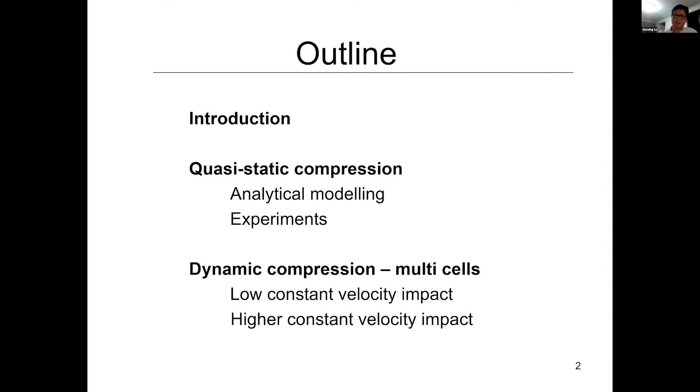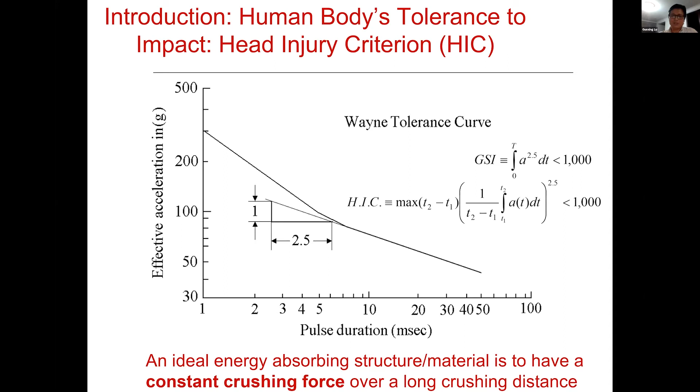This indicates that when we design an energy absorbing structure or material, we want to make sure that the force is a constant force over a long distance or long stroke. The reason being that if the force is too excessive, from Newton's second law, the acceleration, which is equal to force divided by mass, will be excessive. So ideally, when we design a structure or materials, we should have a constant force over a long stroke.

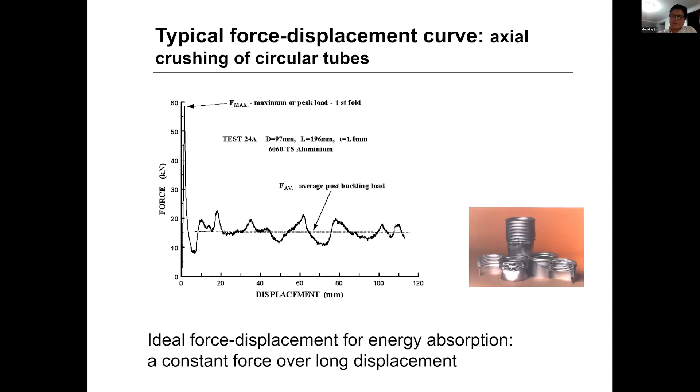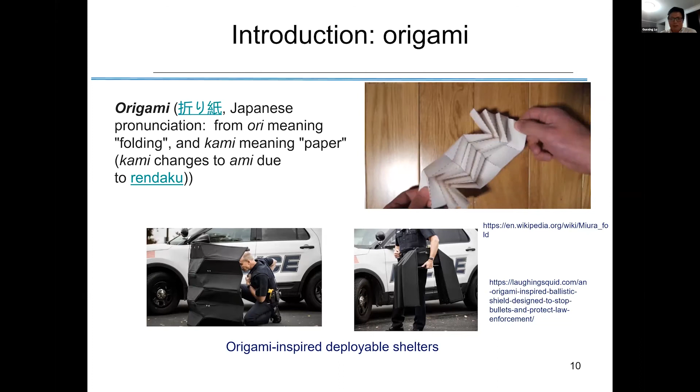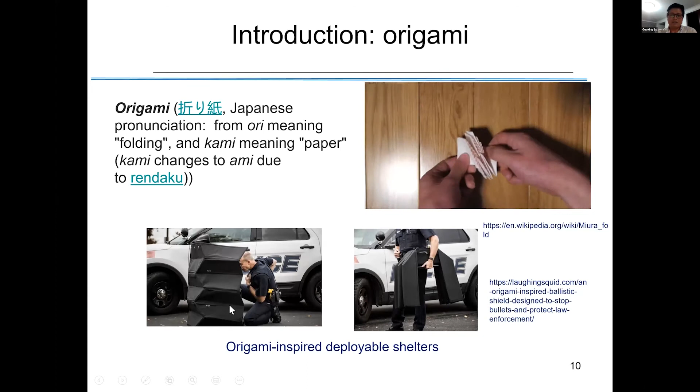One example is shown below by Professor Larry Howell from Brigham Young University in the States, whom I met a few times. Larry actually designed a foldable shield made of Kevlar. This is portable, and we can transport it to different places.

And that acts as a shelter for policemen, for example. And once it's done, then we can fold it and pack it in the car and drive away. So this is one application of origami structures as a deployable structure.

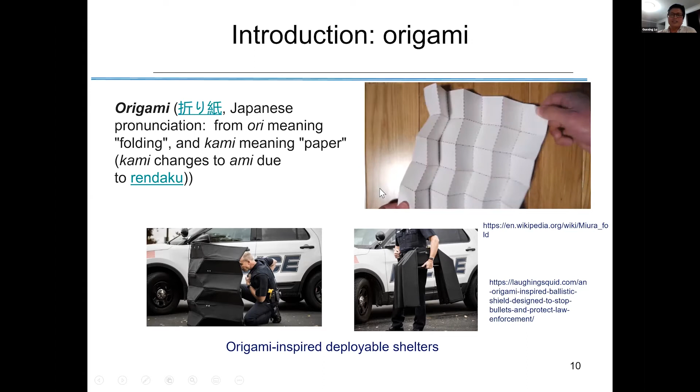Our interest is slightly different. We try to apply the concept to design so-called metamaterials. A metamaterial is an artificial material from which we design the microstructure and put them together. Then overall, globally, we can obtain or achieve certain properties which are otherwise impossible to achieve. So for us, we are interested in the energy absorption of these materials.

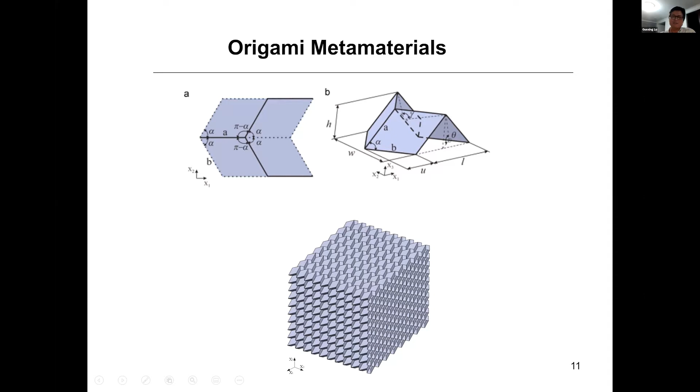So from geometry, this unit cell has got a few parameters: the side length A and the side length B, and the angle alpha. This alpha is within the plane first. So these are the three variables to start with.

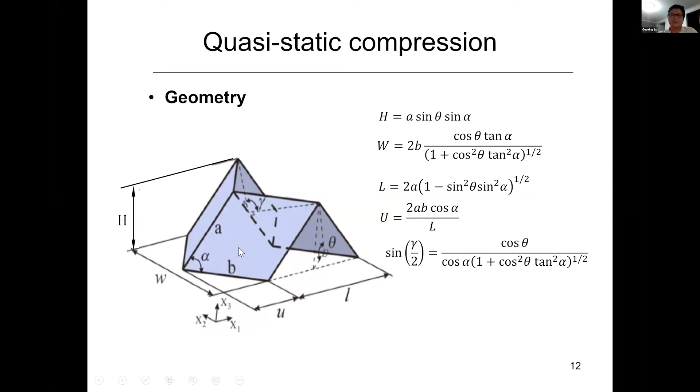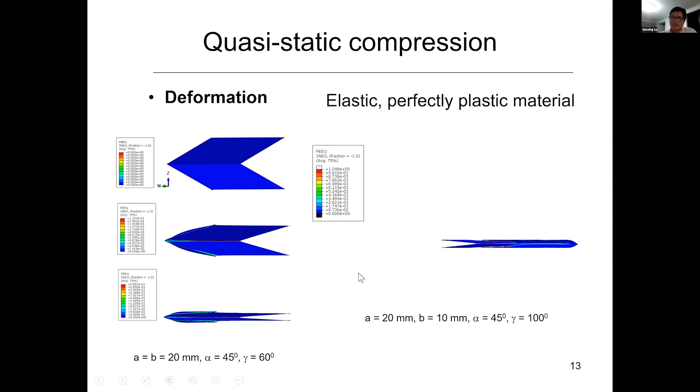So that encourages us to make use of plastic analysis for this unit. Because it's a large deformation, the elastic deformation is small, and we usually ignore the elastic deformation. Also for simplicity, we assume the material behaves like a perfectly plastic material, which means that the yield strength does not change with the strain.

So we can write down the work balance equation for that unit. On the left-hand side, it's the force times the increment of the displacement in that direction, so that's the work done by the external force during an increment of displacement. On the right-hand side, we assume that the work done externally is dissipated by the plastic bending along the hinge lines, along all the creases.

And these are represented by two terms on the right-hand side. The full plastic bending moment, as we all know, is simply equal to the yield stress of the material times the thickness of the sheet squared, divided by 4. That's the bending moment per unit length.

So we can do a bit of mathematical manipulation, and we realize that the angle theta, which defines how much we have folded, actually corresponds to the displacement globally as well. So therefore, we can get a force as a function of theta, which is also a function of displacement.

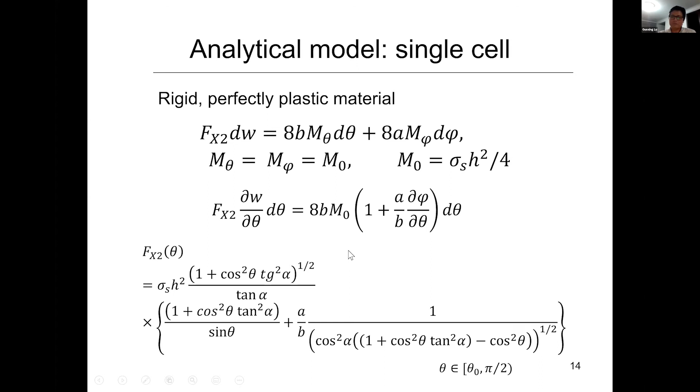The other important parameter is what's the maximum displacement that we can crush, so that is WF. Again, it's purely geometrical, so from geometry we can work out this expression. And in terms of strain, the densification strain will be equal to the maximum displacement over the initial length, W0. Okay, so that gives us the densification strain.

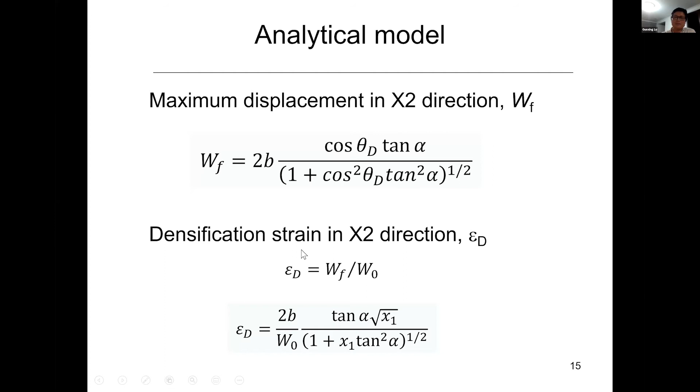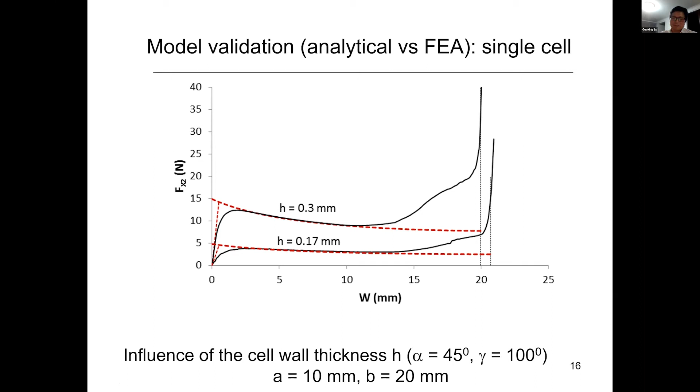So if we plot the force against the displacement, the dotted line is the analytical result for that unit, and the solid line corresponds to the results from the finite element analysis. We can see that the agreement is fairly good for most of the force-displacement curve, except towards the end, the actual deformation is slightly different from what we have assumed using the plastic analysis. There is some contact between the faces on the sheets, and therefore from the finite element analysis, the force is larger. But overall, in terms of the force displacement, the agreement between the analytical results is pretty good with the finite element results.

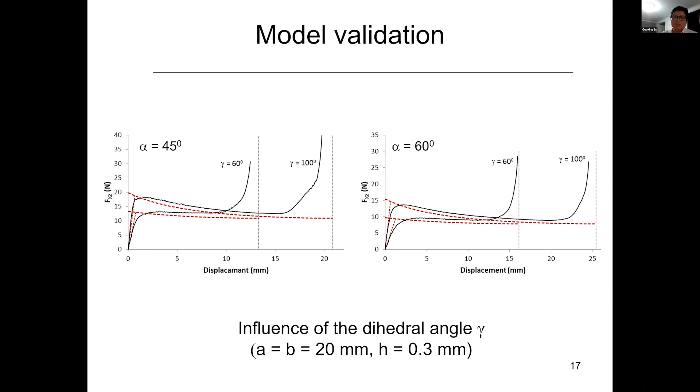We can also look at different values of parameters and see the results. Overall, they are pretty good. Then we try to apply this method to the whole block of material. That's a relatively easy task, because we just need to count the number of cells and count the number of hinge lines.

Then we can figure out the plastic bending energy for this piece of material. On the right-hand side, we made this piece of material with 4 layers of origami sheets glued together. It's made of aluminum, and we do a quasi-static compression test. On the left-hand side, we have a force displacement curve. The solid line in blue is the test results, and the solid line in black is the analytical result.

Again, our very simple analytical result agrees fairly well with the test result, even though we have made the assumption of a rigid, perfectly plastic model.

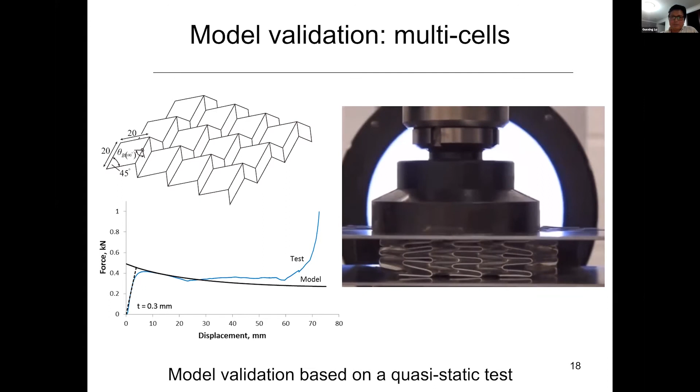Now, we are all very familiar with cellular materials such as honeycombs, foams, and so on. So naturally, when we define the mechanical properties of such materials, we quite often make use of something called relative density. We were very interested in calculating the relative density for this origami metamaterial.

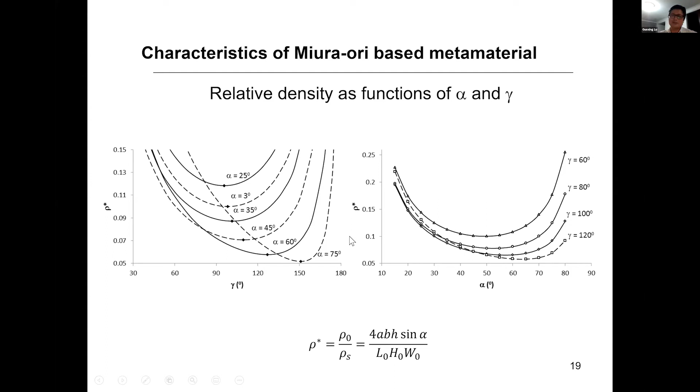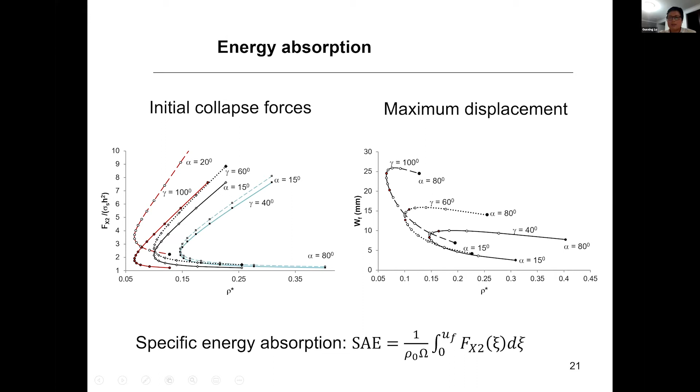Then what we did was look at the specific energy absorption, which is energy absorbed per unit mass. We can integrate the force over displacement to get the energy and then divide by the mass, which is the density times the volume. So we can work out this quantity.

Our interest was how this material compares with, for example, honeycomb. We look at the expressions for a usual honeycomb under in-plane compression, and the specific energy for the honeycomb. We also define something called the efficiency factor, which is the specific energy times the density of the solid material over the yield strength of the material. That's really to eliminate variation caused by the parent material property.

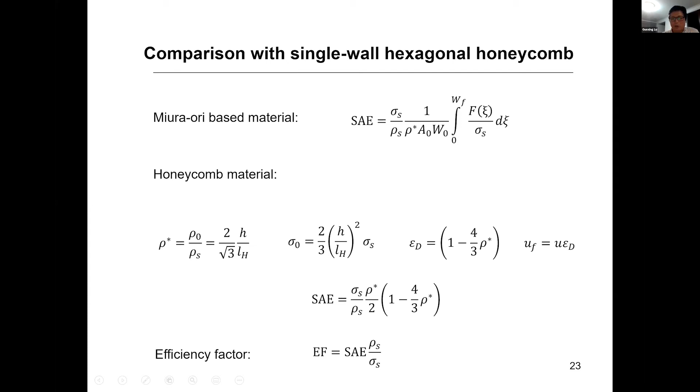When we plotted this efficiency factor as a function of relative density, the red line is for honeycomb, and the points and solid lines are for the origami metamaterials. Once we did this first plot, I was quite disappointed, because almost all our points for the origami metamaterial are below the honeycomb, indicating that this material is not as good as honeycomb.

So we tried again with other values for the geometries, and interestingly, we found that under certain geometries, shown on the graph on the right-hand side, the behavior of this material could be better than honeycomb.

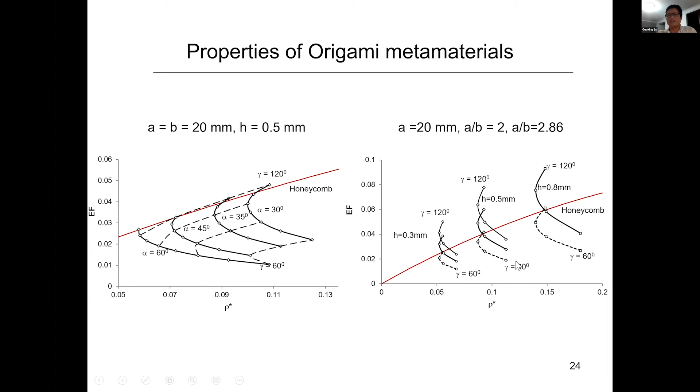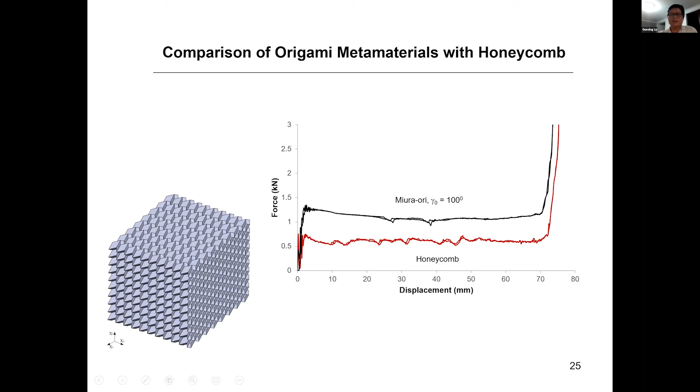Just to show this concept, we did finite element analysis for this piece of metamaterial, and we get this black solid line on top. For the honeycomb, we get this red line. That demonstrates that sometimes we could get slightly better performance.

So that was for compression in one direction. Naturally, we were thinking, how about compression in the other direction? So we took nominally the same piece of material and crushed it in the other direction. This is what happens.

On the right-hand side, we plot the force as a function of displacement. You can see experimentally, the red line is shown here, and the blue line is from the finite element analysis.

And from the simple geometry, we realize we can work out the analytical solution quite easily as well. The analytical solution is this dark square line here. Interestingly enough, the analytical results show very good agreement with both the test and the finite element results.

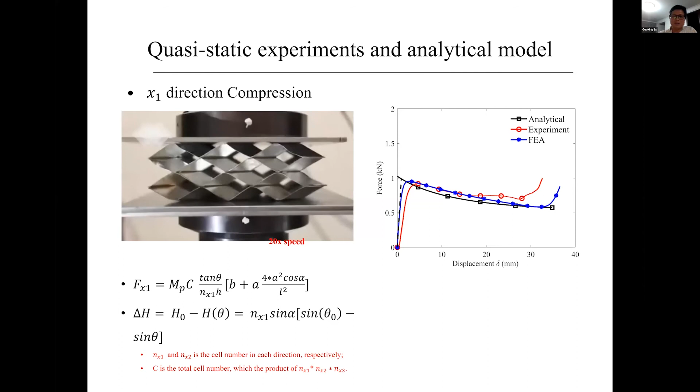We also look at the crushing in the other direction, the third direction. This is what happens. We plot the force as a function of displacement, and again we get experimental and finite element results.

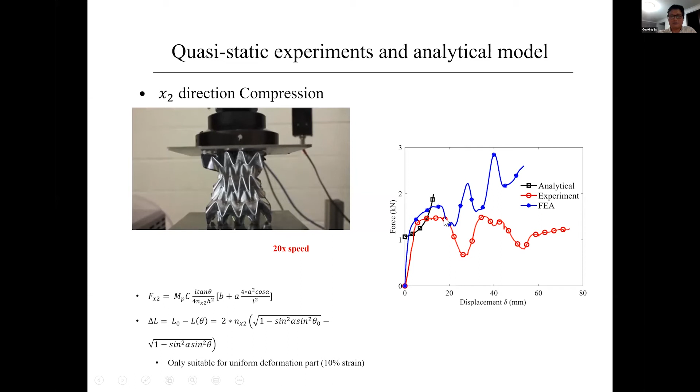Initially, this material behaves like a piece of bulk material until, towards a later stage, you can see localization and also buckling and so on. At least for the initial part, our analytical solution for this direction seems to be okay, even though it's not as great as for the other two directions.

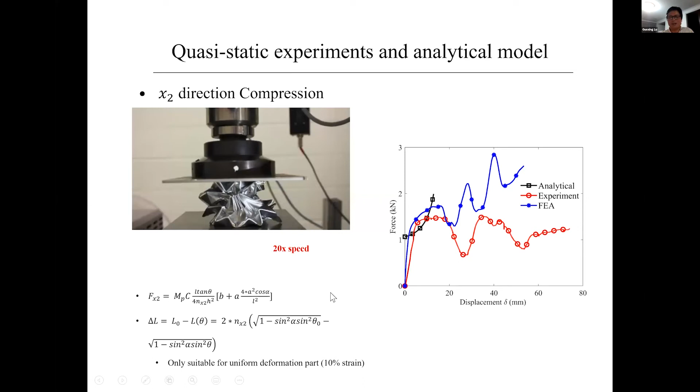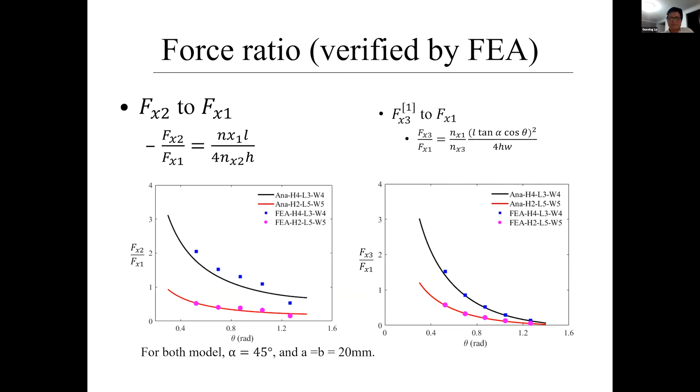So again, we can look at this approach for different values of folding angle and so on. From finite element analysis, and also our analytical results, we seem to have a very good agreement for the forces in the other two directions. So that was for the quasi-static case.

Now the question is, what happens if we crush this block of material under impact loading? So we started with a unit cell. You can see the animation from the finite element analysis. When we look at this one, we can see that the force required externally to deform this unit cell is composed of two parts. One is required to overcome the quasi-static strength, which is FQS. The other part is really to enhance the velocity of this piece of mass from initially 0 to a constant velocity later on.

So then we apply the conservation of momentum. On the left-hand side, it's the impulse actually. It's the dynamic force Fd minus the quasi-static force Fqs, and the difference, if we integrate over a time interval, is the impulse. This impulse is used to increase the momentum of this cell, which is the mass times the velocity. The initial velocity for this cell was 0. And of course, the time interval is T1 minus T0, which is given as the cell size divided by the velocity. So we can do a bit of manipulation.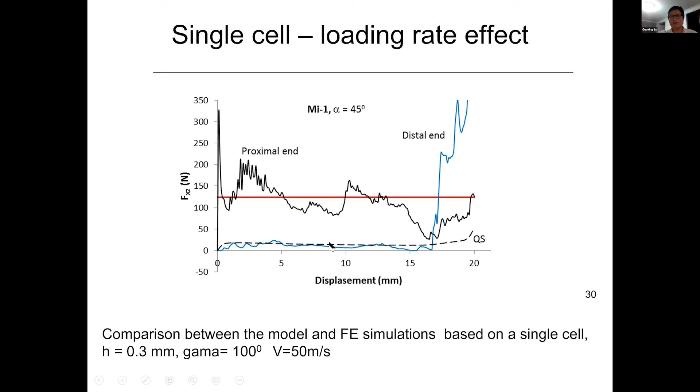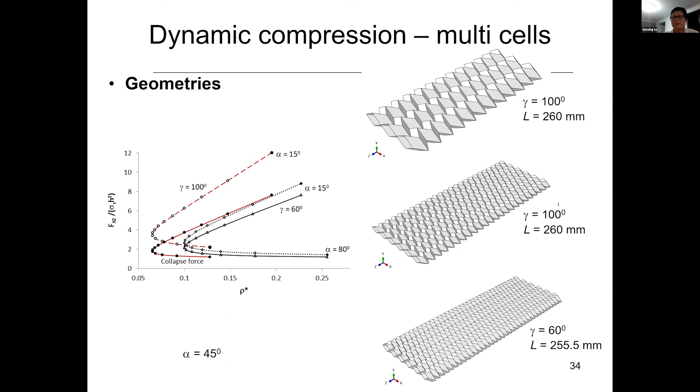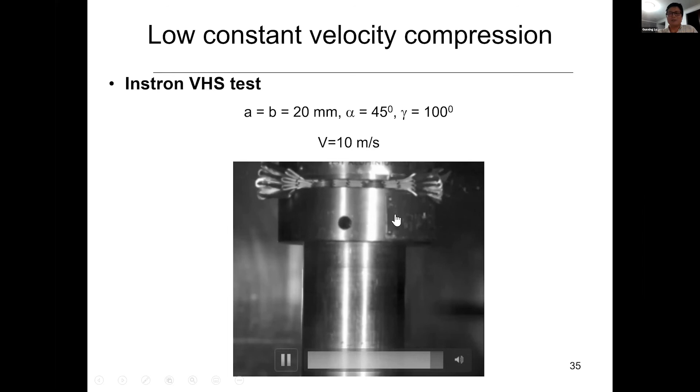So that was for the unit cell. Then we wondered what happened if we have a block of a so-called metamaterial made of this sort of unit cells. So if I do an impact test, now this is a compression test. We used a VHS system, which is capable of applying a constant velocity up to 10 meters per second. This was done for 10 meters per second, and we use a high-speed camera to take photos of this, and we can measure the force and so on.

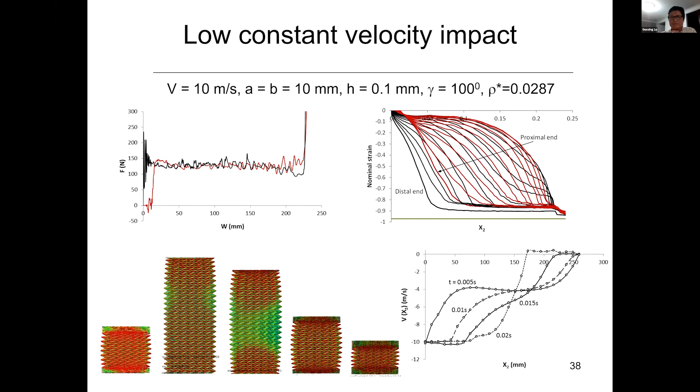If we increase the velocity a bit more, v equal to 30 meters per second, we start to see deformation starting from the impact end at the top, and then later on towards the support end it also has a bit of deformation as well. If we increase the velocity to 50, we have something like this, and the deformation is very much localized at the impact end. Also the two forces at the impact and the support end are very different now.

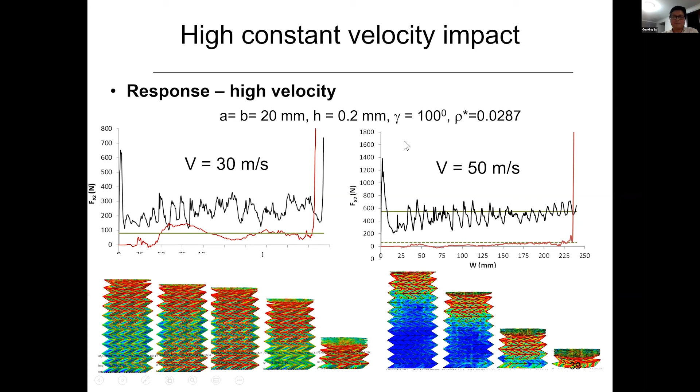And if we increase the velocity, for example, to 100 meters per second, the impact force and the force at the support end are shown on the right-hand side. Our analytical result again is given as a constant force, in red. You can see that overall the analytical result is able to capture the average force.

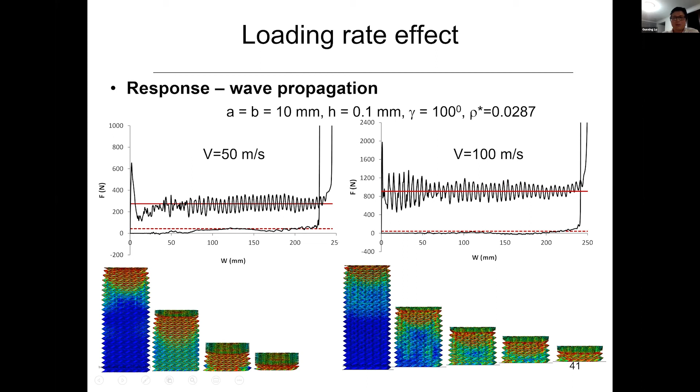So that was for the case when the velocity is a constant after the impact and is kept constant. If we had another impact scenario with a mass and also initial velocity, during this crushing process, the velocity will decrease. And then you can see that the force actually decreases when the displacement increases.

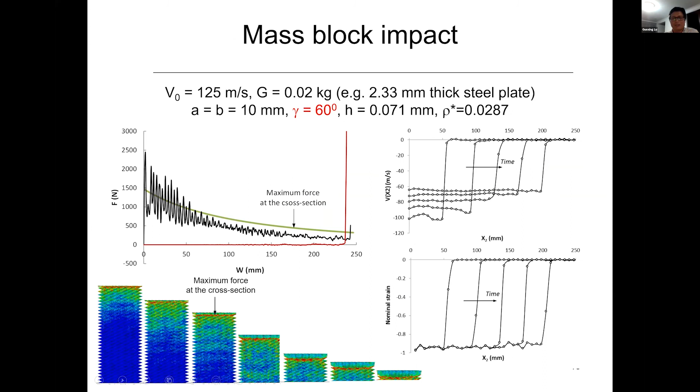So similarly for other velocities, I should not get into the details. And we look at different densities for these metamaterials, similar behavior occurs. So I should skip it.

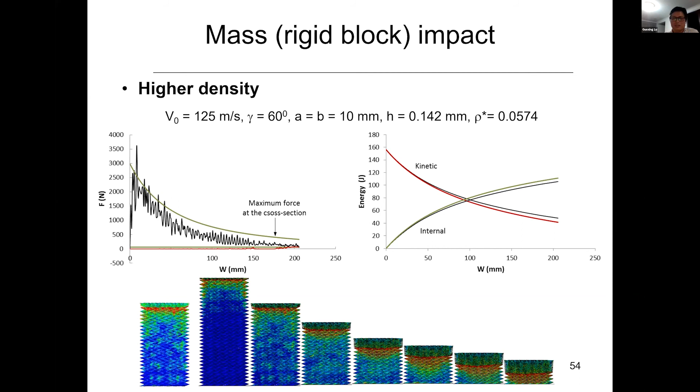That was for a uniform metamaterial. One of the advantages of this origami metamaterial is we can change the geometry to have a certain behavior. One feature we could do is change the values of geometrical parameters for different layers, so then effectively we could have so-called graded metamaterials.

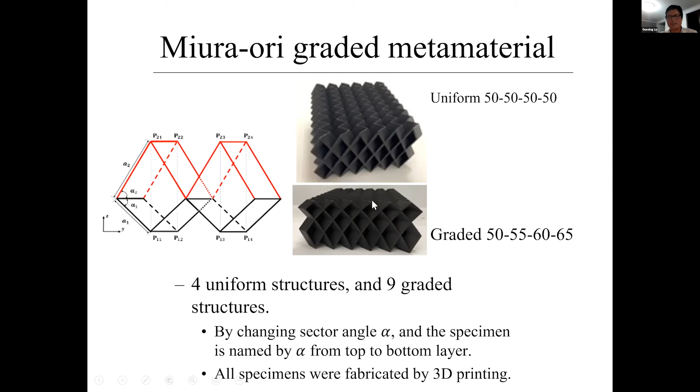And we tried this, we 3D printed this metamaterial, and then we even crush it. That is for the quasi-static case. This is made of a polymer, not metal. We crush it on the right-hand side and get the force displacement curve. The top one was for the uniform, and the bottom one was for the graded material.

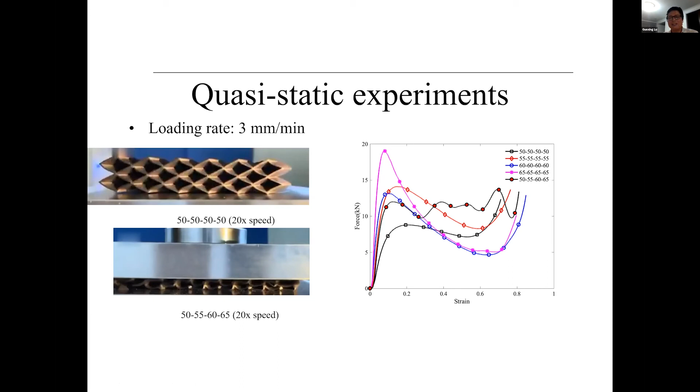What I would like to highlight is on the curves on the right-hand side, we can see that sometimes there is a big fluctuation. By adopting certain gradients into this material, we can have a more or less flattened force displacement curve, as shown by this red circular curve here. So that offers us a way to tune this material behavior simply by changing the geometric parameters.

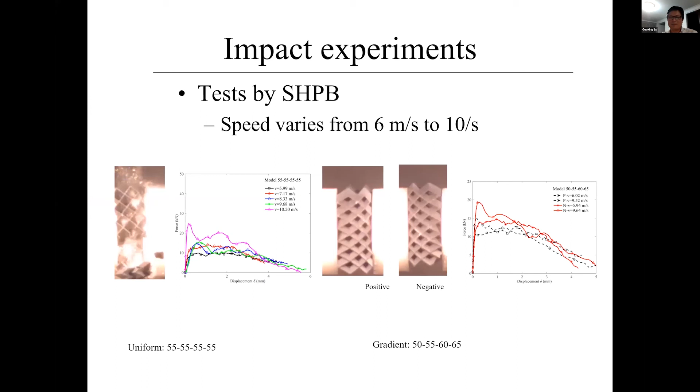We also did some impact tests, and the highlight for this one is the impact test gave us a fracture behavior, rather than ductile behavior. This is something we really have to watch out for.

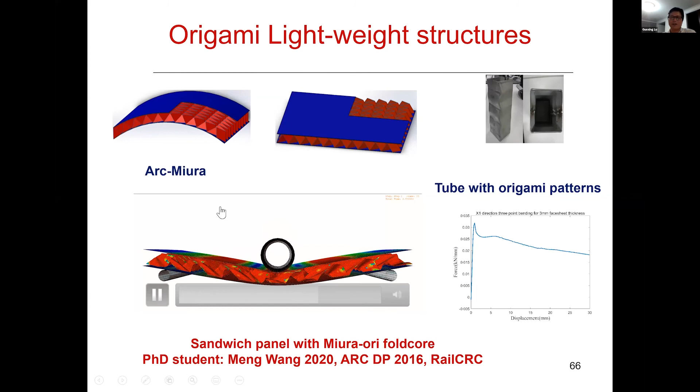That was for the metamaterials and structures. We also adopt the same concept to design structures. For example, on the right-hand side, we introduce initial imperfection, if you like, to eliminate the peak force. And at the bottom here, we can have a sandwich panel made of origami core to look at the energy absorption. That was for the Miura pattern.

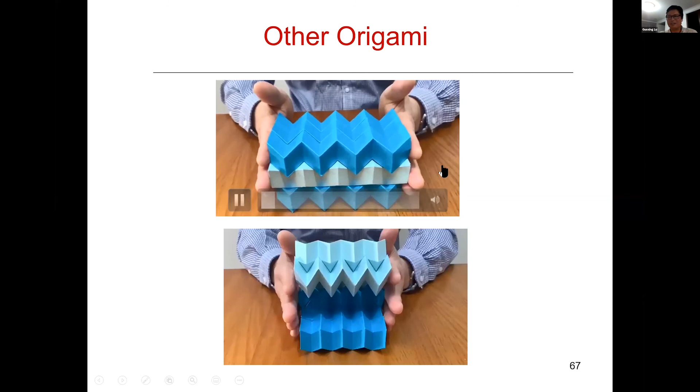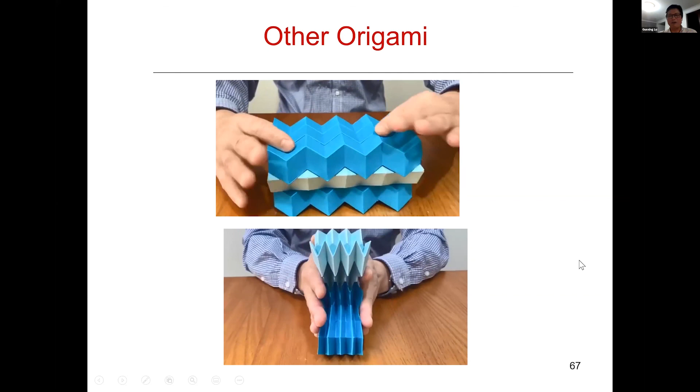And there are other origami patterns. During the lockdown in Melbourne, I managed to fold some and did some crushing of different units. You can see that we can overall get different geometries and kinematics and so on.

So if I just try to summarize, I'd like to emphasize that by adopting this origami concept, the concept offers a new dimension for us to look at designing materials and structures simply by changing the geometry. Also, our traditional structural plasticity theory can be successfully applied to capture the energy absorption behavior of such materials, and the impact mechanics seem to be valid as well for this.